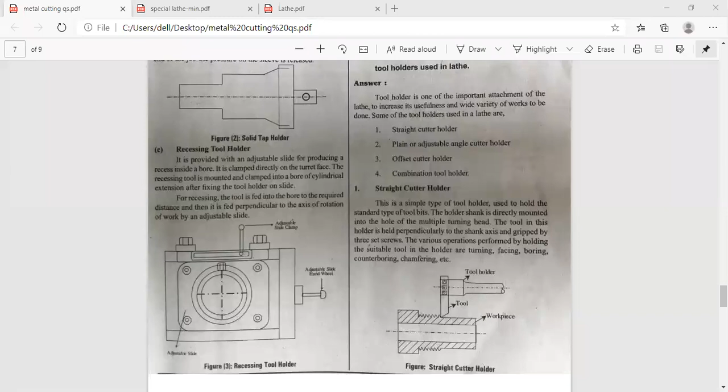Just try to go there. So we have a tool holder, we have the tool, and this is a workpiece, and mostly the holder shank. The shank is directly mounted in the hole of the multiple turning head.

We have different multiple turning heads, but here we will use only one type, because in the turning centers we try to use more of them.

So the tool in this holder is held perpendicular to the shank axis, and gripped by 3 set screws, as shown in the figure.

The various operations performed by holding the suitable tool in the holder are turning. So what operations can you perform? Turning, facing, boring, counter boring. After boring, you go for counter boring up to a certain depth of that particular hole, or the already bored hole. And chamfering, etc.

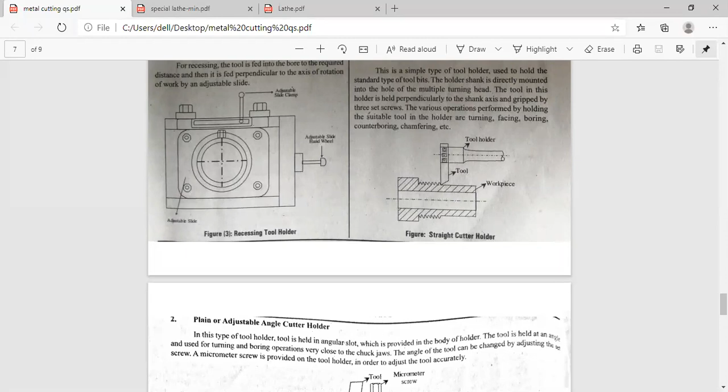Chamfering is an important part in order to reduce sharp edges. You might have seen all that in the practicals in the machine shop, and you have the lab also, so you can know it very well.

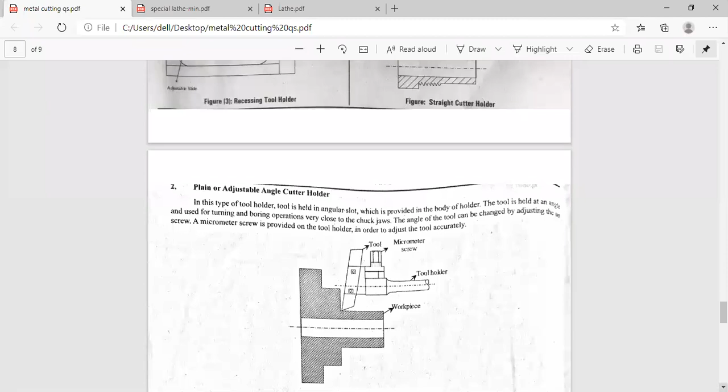The second one is the plain or adjustable angle cutter holder. In this type of tool holder, you can see the tool is held at an angle, which is provided in the body of the holder.

This is a micrometer screw, used to hold the tool at a particular angle for turning operations. Boring operations are performed very close to the chuck jaws.

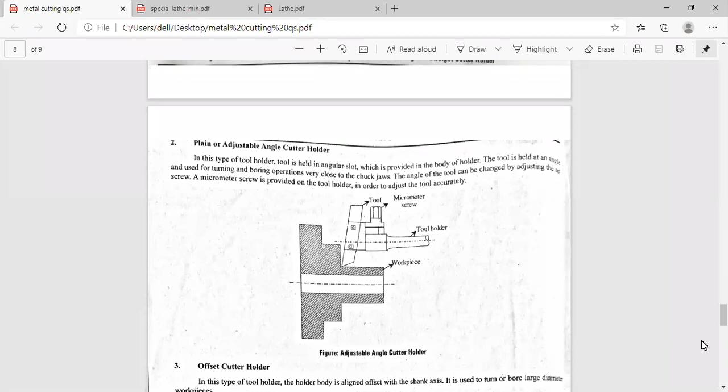So the angle of the tool can be adjusted by adjusting the set screw, the micrometer screw, which is provided on the tool holder. Other tool holders don't have the micrometer screw, because in this adjustable angle cutter holder, you have to set the tool at a particular angle. This is a very important type of tool holder where you want machining operations at a particular angle.

Now just try to see the diagrams. This is a step, and this is the workpiece, the job, and the tool holder. This is the tool, and these are the set screws, which fix the particular tool on the body of the tool holder.

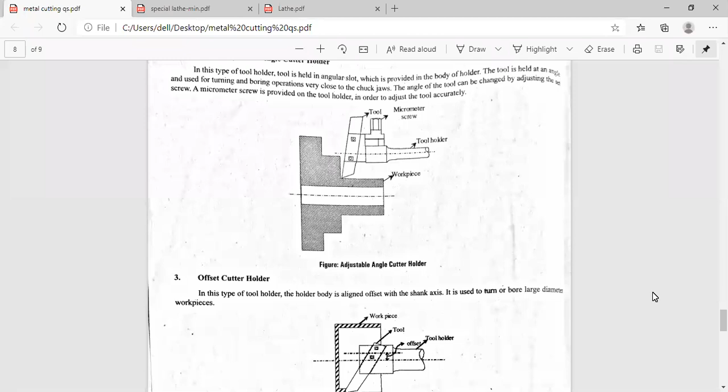So if you want angular slots, angular grooves, or any other such operations, you have to use that particular plain or adjustable angle cutter tool holder. So what is the offset cutter holder?

Offset cutter holder is one of the particular holders in which we try to provide the tool at a particular offset. Offset means not exactly aligned. This is the axis, this is the tool, this is the job axis, and you try to have that particular offset. The thing I'm showing by the arrow is offset.

The tool offset, how can anybody determine the tool offset, how do you calculate the tool offset? Tool offset is nothing but you have to take half of the diameter of the cutter or half of the diameter of the tool. Suppose the diameter of the tool is 1 mm, you try to take the offset as 0.5 mm. That is very important because tool compensation and tool offset are very important terms in computer aided manufacturing.

And we have angular offsets, so particular offsets can also be made with the offset cutter holder, if we want a particular offset for the particular job or workpiece as per the design. And tool compensation, we have left hand tool compensation and right hand tool compensation, with some G codes related to that compensation in CNC programming.

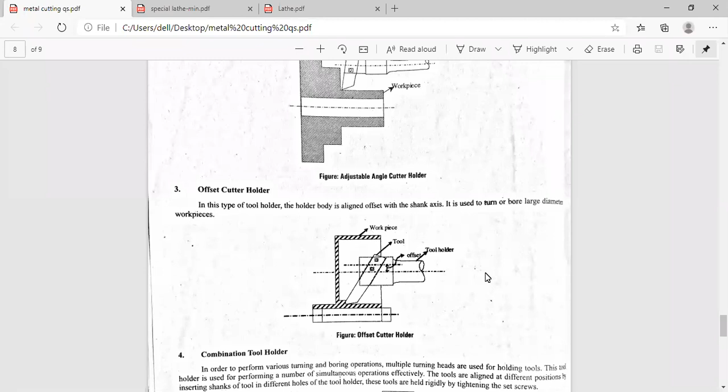But as of now, what is tool offset? Already I told you, you have to take half the diameter of the cutter. This is the tool holder, and this is the tool. We have the set screws. This is the workpiece where we have to go for the offset. So in this type of tool holder, the holder body is aligned offset with the shank axis. This is the shank axis, so it is held at an offset. So you have to calculate that offset and try to turn the tool with that particular value.

So here it is used to turn or bore large diameter workpieces, and you have to use it as per the design, whatever your requirement is.

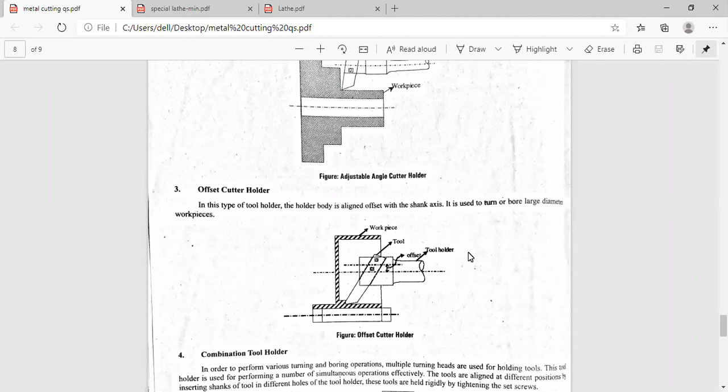So next one, it is a combination tool holder. Combination tool holder is nothing but you have to...

Ajad, can you hear me? Sir, yes sir. Okay, sometimes internet connection is unstable. I'll be asking at that time.

So in order to perform various turning and boring operations, all these particular combination tool holders are used. This is a combination tool holder, and it is used for holding multiple turning heads for using a number of tools like the boring or turning tools, or you can have not only boring, but drilling and reaming operations also.

So it's not exactly like in the textbook. It's a combination of operations like yesterday we have discussed. So this tool holder is used for performing a number of simultaneous operations effectively. That is the very important feature of this one.

And the tools are aligned at different positions. You can see tools, this is one turning head, this is another turning head. So whenever you finish a particular turning operation at this particular head, you can switch over to the other turning head.

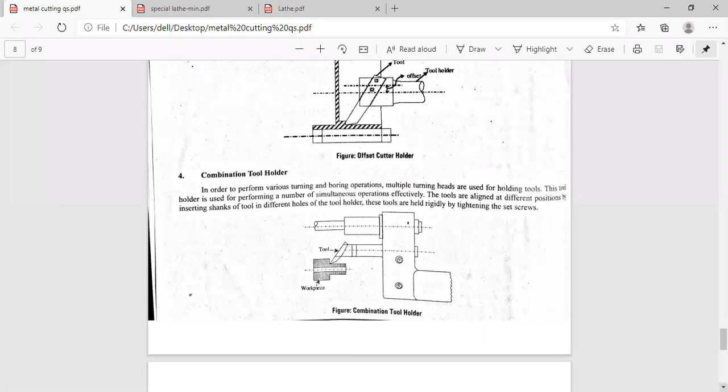So what are the different types of tool posts? We just try to discuss now. Tool holding devices we have finished, and whatever things we have not discussed, as far as today we'll try to finish off all the things related to tool holders, and slowly we'll go for the introduction of the turret lathe and capstan lathe. In one of the PDFs, you have to share another PDF.

The tool post is generally used for the purpose of holding the tool. You know what is the tool post? Already we have seen in the general lathes or the engine lathes or the all gear head lathes, different lathes are there in the particular machine shop, you'll be having that. So it is imparting a rigid support during the machining.

So what are the different types of tool posts? One is the American type single tool post. This is mostly a simple tool post, also known as the American type of single tool post. The tool post where the cutting tool is held by means of a bolt or a set screw at the top, and this is the rocker arrangement. This is the flange of the particular tool post, and in this single tool post, only a single point cutting tool can be held.

Only a single tool. I already told you the difference between a single tool post and a turret - hexagonal turret, an octagonal turret, or a disc turret, which can handle up to 14 tools.

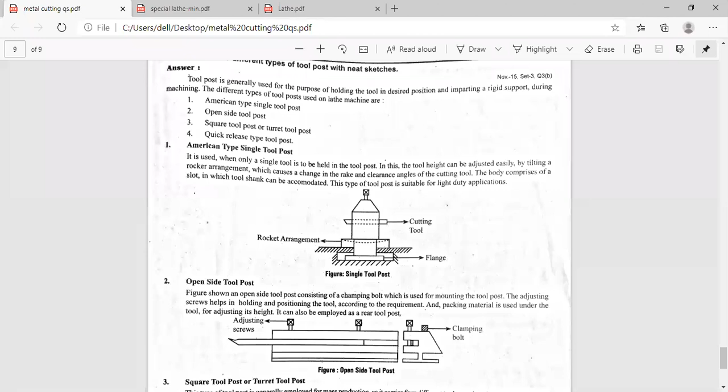It consists of a clamping bolt which is used for mounting the tool post - you have to mount this tool post on the cross slide. So just try to see, the adjusting screws help in holding and positioning the tool according to the requirement. So all these are very important aspects, and you have to use packing material under the tool.

So sometimes what is the packing material? You may be saying only small flat mild steel pieces - they are known as shims, S-H-I-M. In the industry, we used to name them as shims because traditionally the production engineers try to make the shim on the surface grinding machine according to a particular thickness - 0.5 mm, 0.25 mm, not more than 1 mm.

Actually, a shim is a small, slender mild steel sheet, just like this GI sheet. We just try to make it and adjust the tool height. So it can also be employed. This open side tool post can be employed as a rear tool post,

because we can have two tool posts, one at the front and one at the back, because in the machining centers, in the turning centers, we try to adopt two tool posts. Suppose the machining operations are finished on the front tool post, we'll try to change over to the rear tool post. This is known as shuttling, from one tool post to the other.

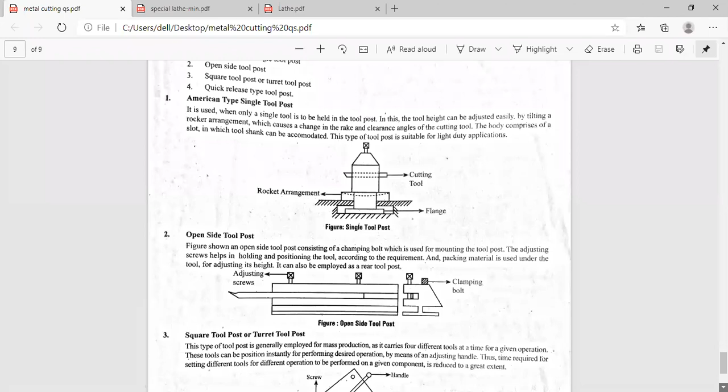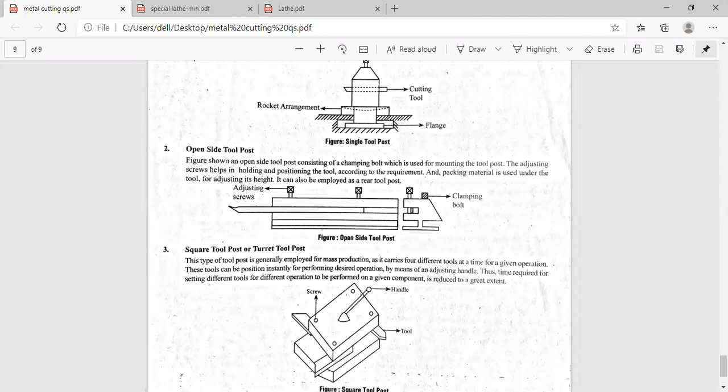So the square tool post is a common design which is employed for most of the lathes, the engine lathes, the square tool post, or the turret tool post in case of the turret lathe. So it is used for mass production. It carries four different tools at a time. Why is it designed for mass production? Because the machine setting or the tool setting can be done at a time for a given operation.

So these tools can be in position. This is one tool, this is one tool, this is one tool, and you fix the tool by means of set screws. So these tools can be positioned instantly for performing the desired operation. So you have to have the adjusting handle to position the tool instantly at a particular place to perform the particular operation, turning, facing or drilling, different operations.

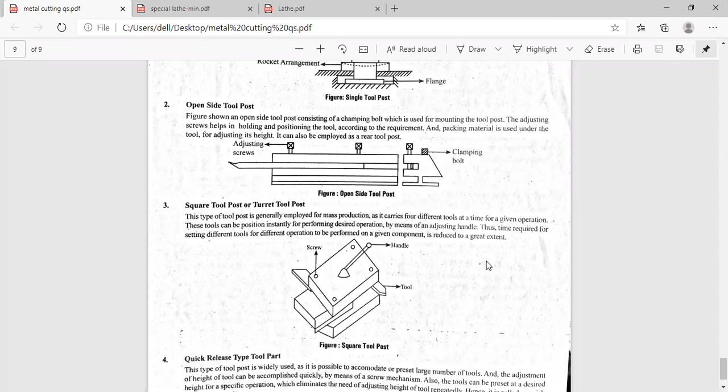So what is the time required for setting different tools? What is the advantage of the square tool post, or the American type, or the open side tool post? We can reduce the machine setting time drastically, because we are setting different tools for different operations to be performed on a particular workpiece or job simultaneously. So whenever that operation has been finished, you position the next tool in front of the job or workpiece. That is the advantage of the square tool post or the turret tool post.

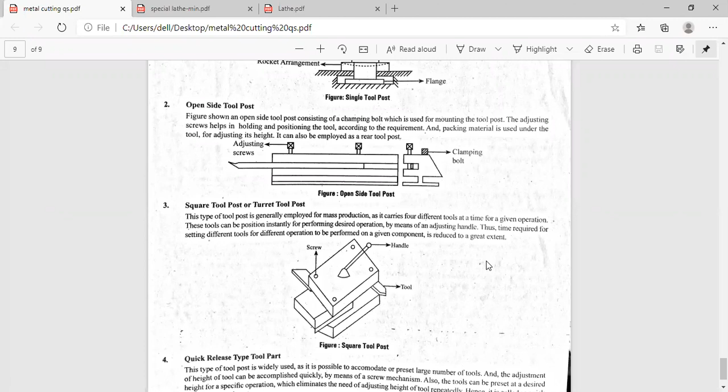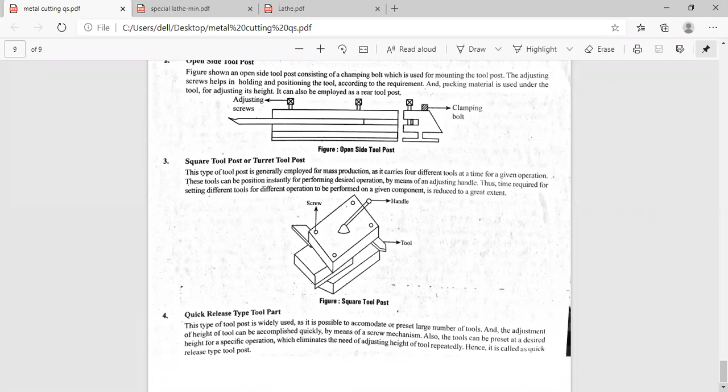It is very important that you have this particular thing. This is also very important as far as the examination is concerned: the work holding devices, the tool holding devices, and the tool post. So the quick release. It is quick change tooling. The quick release type of tool post is used in quick changing of tools. So it is mostly used to accommodate whatever number of tools are there.

Actually, in the machining center, another feature I want to tell: you can have a large number of preset tools in the tool magazine. It's a storage of the tools. Why has the word magazine come? In the .22 or the .303 rifles used in the army or navy, they have magazines for the bullets that have to be loaded in the gun. The ordinary gun has 6 bullets, but the tool magazine can accommodate, the theoretical limit is 48, 54, and 60.

So you may have a single row or a double row; we have different types of tool magazines. We will discuss them later. Double row means another expandable type of tool magazine. It can accommodate another row. And we have the chain type of tool magazine. We'll discuss it in the CAM subject. So manufacturing is a very interesting subject, because of automation, and because a country's economy depends on the hands of the manufacturing people.

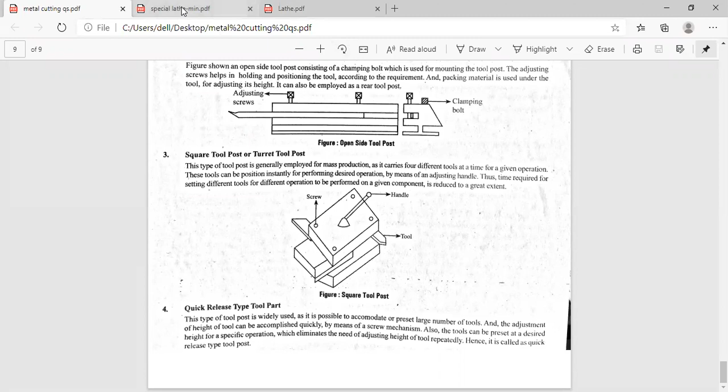In computer aided manufacturing, it is known as quick change tooling. So that is very important, and it is a quick release type of tool post, which is very advantageous when compared to the other tool post. That is very important. So we'll just switch over to the things we have not covered yesterday. Another new share, we'll just try to go for that.

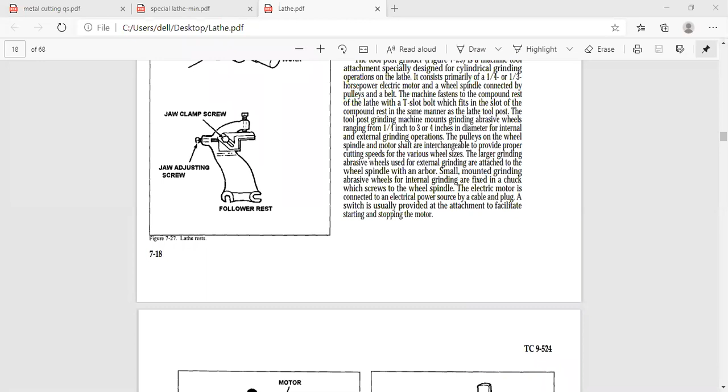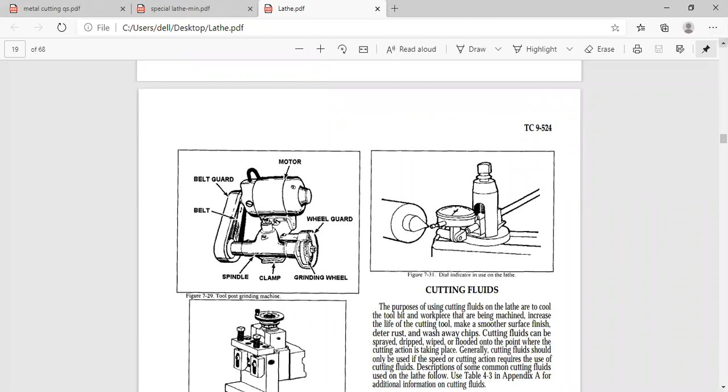Now, all this was taught yesterday, only the revision I am doing now. Okay, so we have the grinding wheel, and I want to tell about the tool post grinder. The tool post grinder is given in one figure. We see where we use the tool post grinder, especially designed for cylindrical grinding operations, because the surface grinding machine is another machine tool, which we will discuss in unit 4 or unit 5.

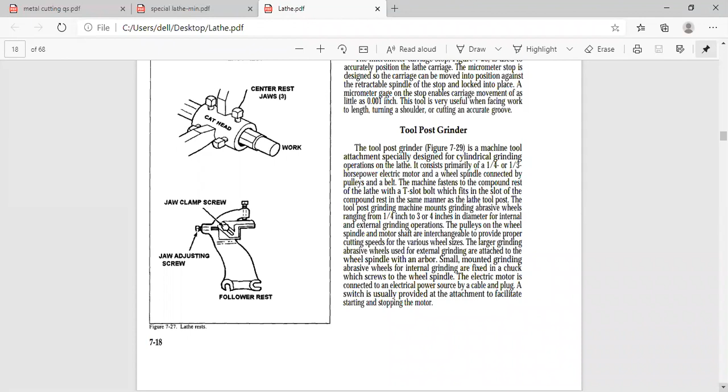But this is a completely different type of tool post grinder. We have abrasive wheels for internal grinding, and they're fixed in a chuck. So just see the diagram related to the grinding post. This is the tool post grinding machine. Here we have the motor. This is a belt guard. This is a belt where we operate the grinding, if you want to go for slow grinding or medium grinding, because it will affect the surface finish on the job. So this is the wheel guard.

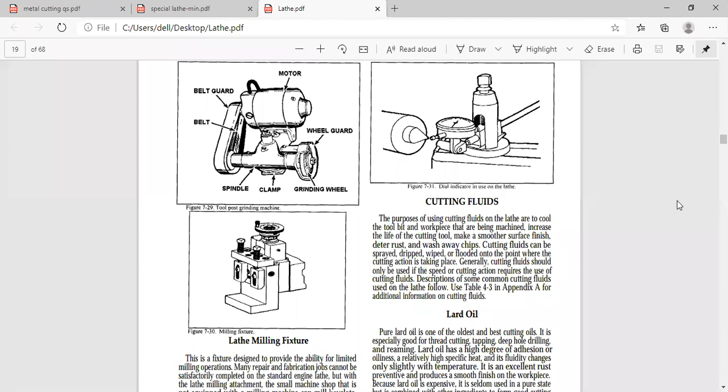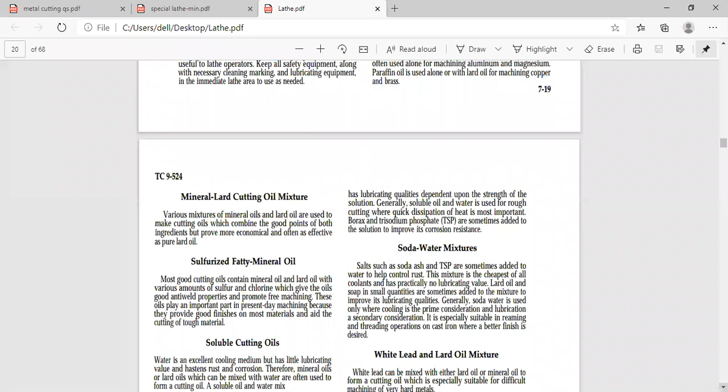This is the grinding wheel. Grinding wheel we will discuss, because it is one of the grinding operations. We have to have an abrasive type of grinding wheel with different grits, silicon carbide and other types. This is a clamp, this is a spindle. So this is a tool post grinding machine. Other than the quick change tool post, you can add this tool post grinding machine also. So all these are very important things. Here these mandrels were discussed.

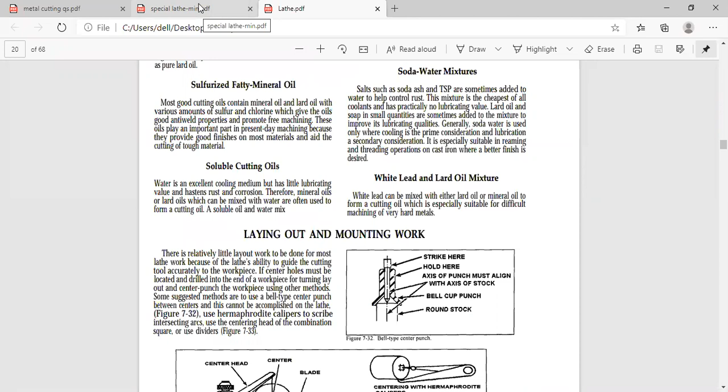So we'll just try to move to another PDF where we have the introduction of this particular topic. I'll go for the new share now. So we'll try to switch over to this particular screen. Can you see the screen now, Ajad?

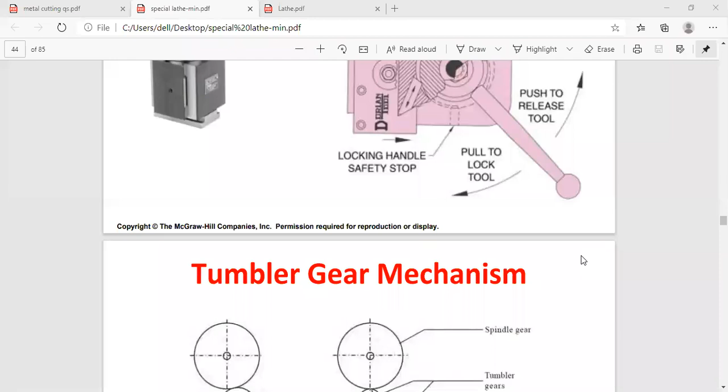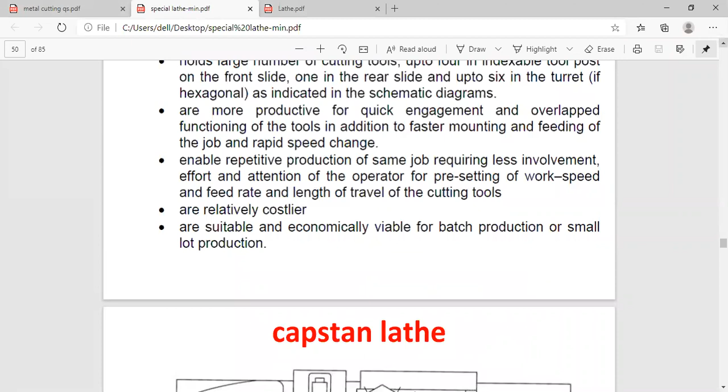Yes, sir. Okay. So now we'll go to the introduction of the capstan lathe. We have finished all the previous things, and slowly we'll finish the capstan lathe and turret lathe tomorrow. Today we'll go for the introduction, and we'll see the differences between the capstan lathe and turret lathe, the differences between the capstan lathe and engine lathe, and everything.

So in contrast to the center lathe or the engine lathe, these lathes are semi-automatic. What are the features? They possess an axially movable indexable turret. Already we have spoken a lot of times: the tailstock is replaced by the hexagonal turret. It holds a large number of cutting tools, up to 4 indexable tool posts on the front slide.

So you can use a square tool post, or you can use the hexagonal turret. You can use 2 tool posts, one on the front slide and the other on the rear slide. So you can use up to 6 tools in the hexagonal turret, and you will see the diagrams later, but we go for the introduction now.

These are used for quick engagement and overlapped functioning of the tools, like the quick change tool post, in addition to faster mounting. You have to feed the job, go for the quick change tool post, and go for the rapid speed change, because the rapid speed change is done by the tumbler gear mechanism. We will discuss some of the mechanisms at the end, after the discussion of the capstan and turret lathes, because they're very important.

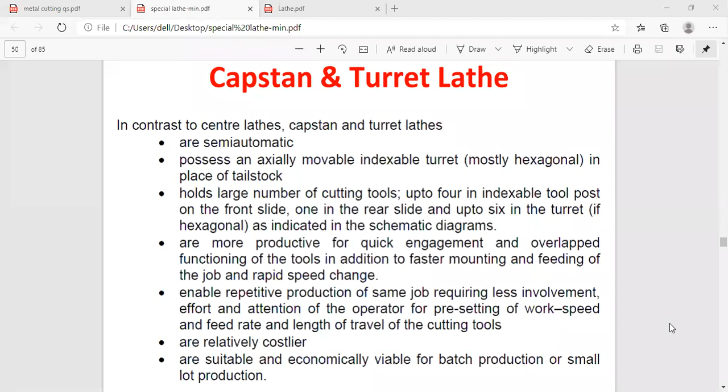The machine setting time is reduced drastically when compared to the center lathe, and that's why the productivity is more. The same design of job pieces, the same batch of job pieces can be made. That's why it's useful for batch production. So all these are the particular type.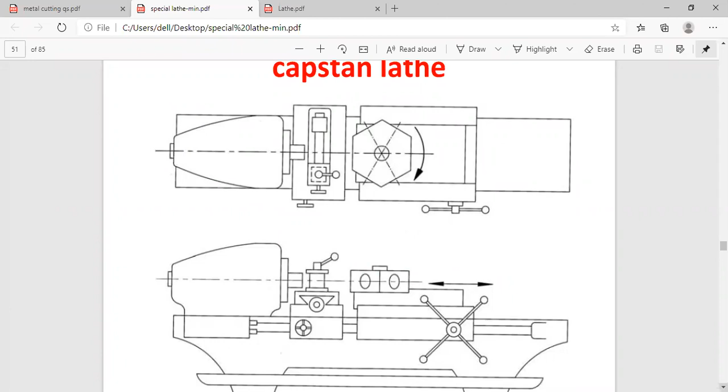This is a tool post. This is the handle of the tool post. This is the hand wheel to operate the carriage. So all these are semi-automatic. The tumbler gear mechanism, whatever mechanisms are there for the change of the spindle speeds, can be incorporated at the headstock side, because it is covered.

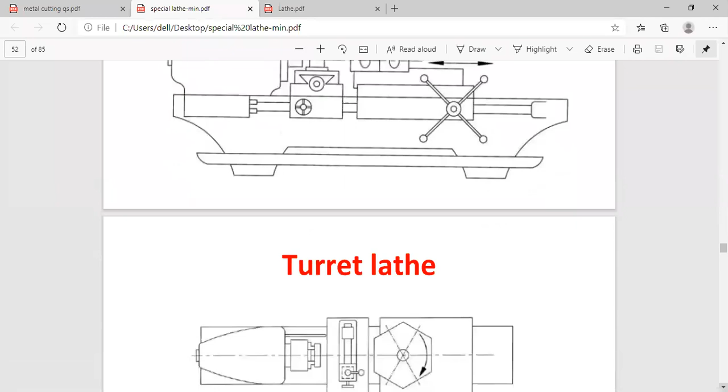This is a simple diagram anybody can draw as far as a capstan lathe is concerned. You already know the components. The other components we have discussed in a center lathe or engine lathe are same, except the hexagonal turret, which is replacing the tailstock. We don't have the tailstock in the capstan and turret lathe. The hexagonal turret, everything is same.

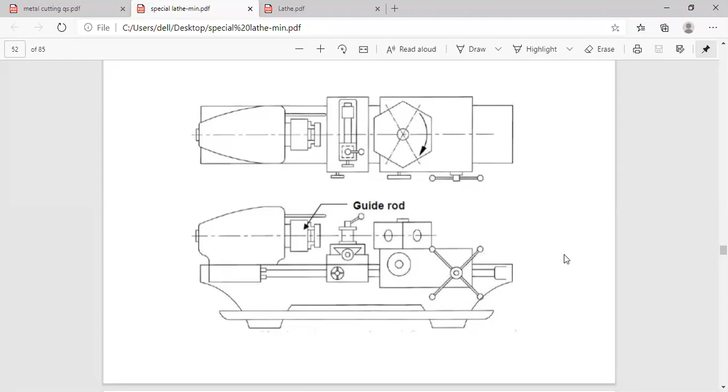So everybody can ask what is the difference, because some of the guide rods may be missing in the capstan lathe. In the turret lathe, the guide rods are there to guide the guideways or the job pieces. The hand wheels, the tumbler gear mechanism, and the feed mechanism, automatic or semi-automatic, everything is there. So concentrate on this part also, the capstan and turret lathes, which are very important.

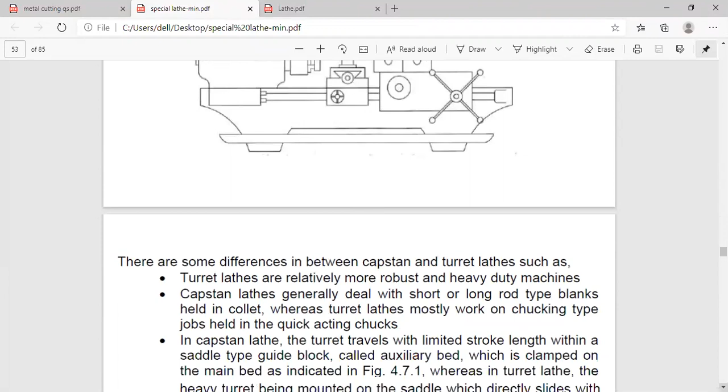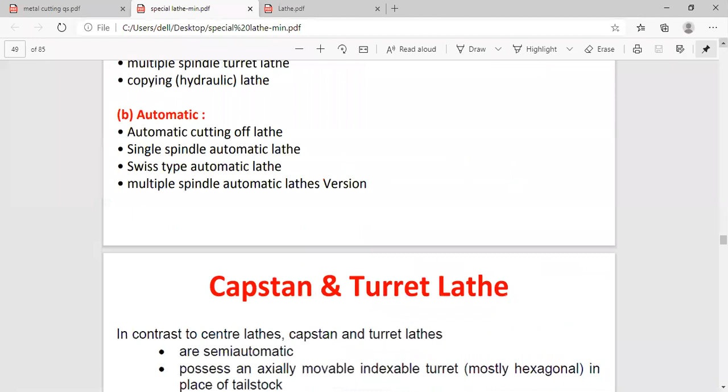This is only introduction. That's why I'm going fast, but you will try to know the differences tomorrow. So try to draw the figures related to this, and these are very important features which we have discussed. If anything is there, we'll discuss that today itself, and we'll continue later after the capstan and turret lathes. We just try to scroll and see.

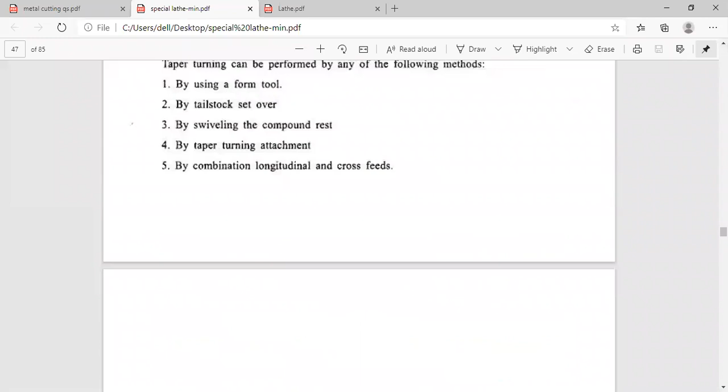So we have finished the taper turning methods, but we have the semi-automatic and automatic lathes also. In computer-aided manufacturing we have two keywords, fixed automation and flexible automation. Flexible automation is where we use computer numerical control machines, CNC machines, and fixed automation is like the capstan lathes and turret lathes, where you don't use CNC part programming, G codes and M codes. That is the main feature of semi-automatic.

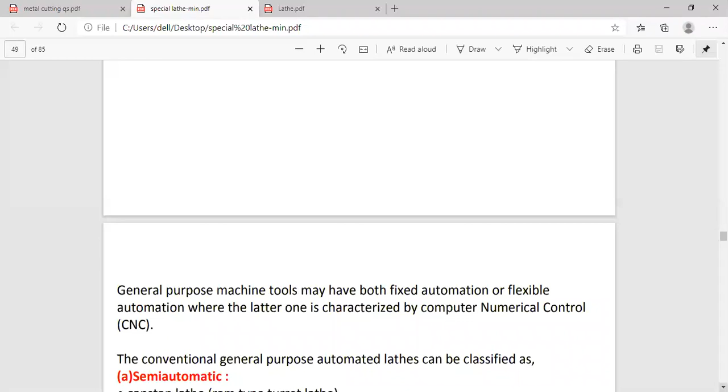In the semi-automatic classification, we have the capstan lathe. The capstan lathe is also known as the ram type turret lathe, because you have a ram, just like an overhanging beam, a heavy duty ram. Then we have the ordinary turret lathe. The turret lathe is mostly governed by the saddle. We'll see what are the important features of the turret lathe also.

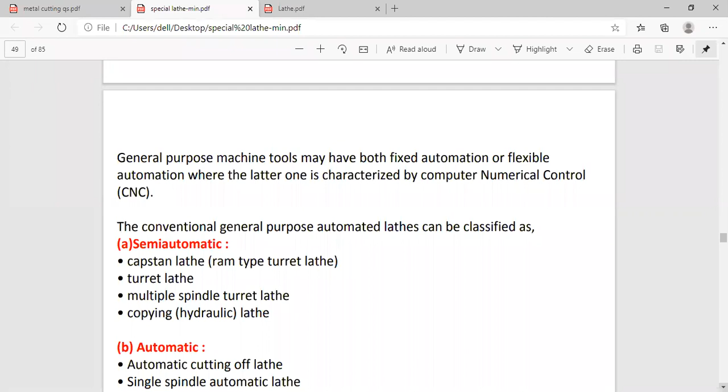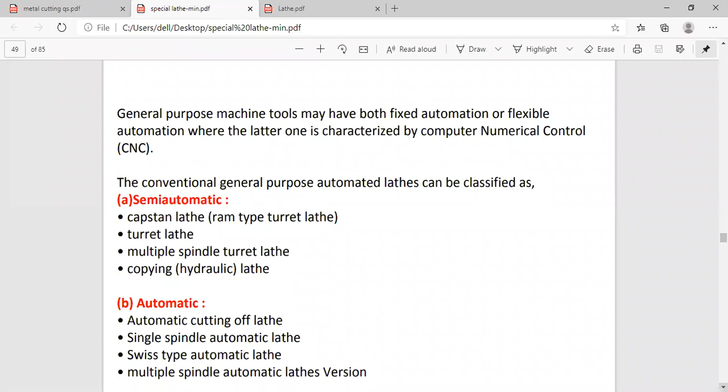And we have the multi-spindle turret lathe, like the multi-spindle automatic lathe, where we can use more than one spindle: 2, 4, 6, 8 spindles. And we have the copying lathe, just like the form tools designed for a taper turning operation. This is a hydraulic actuated lathe; we use hydraulic cylinders in the copying lathe. So semi-automatic lathes include the capstan lathe, turret lathe, multi-spindle turret lathe, and the copying lathe. As already told, concentrate mostly on the capstan and turret lathe.

In the automatic lathe category, we have the automatic cutting off lathe, the single spindle automatic lathe, and the Swiss type of automatic lathe.

Swiss type automatic lathes are also known as automatic screw machines, because they were mostly designed by the Swiss people of Switzerland. Apart from turning and facing operations, in that country they used to turn external and internal screw threads. Instead of using taps and dies, the threading tools are designed according to the particular form, whether external or internal. That is the Swiss type of automatic lathe.

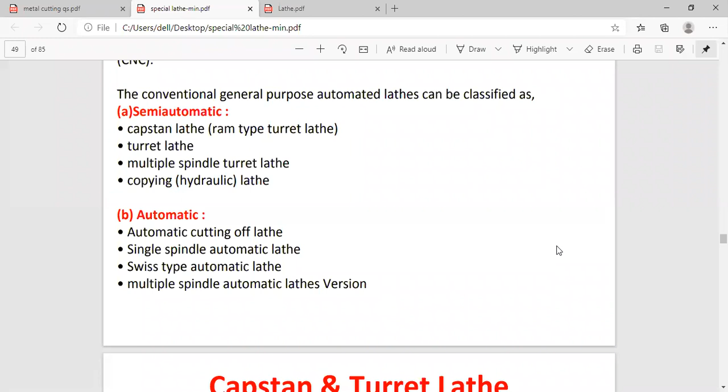So we have single spindle and multi spindle types. Single spindle uses only a single spindle, but in a multi spindle automatic lathe we use more than one - 2, 4, 6, or 8. Mostly we use even numbers, because in a particular lathe, for corresponding headstock you have a corresponding cross slide. In the case of multiple spindle automatic lathes, you have different cross slides.

Suppose you number them 1, 2, 3, 4 - you have cross slide 1, cross slide 2, cross slide 3, cross slide 4. Each cross slide has its own action. The movement can be done by means of hydraulic movement, pneumatic movement, or by means of the cam.

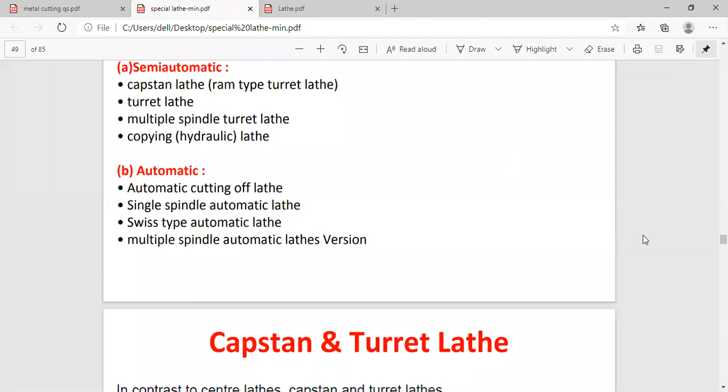Cam is a very important word because a cam is used in the machine shop, especially in the automobile manufacturing industry for finish OD turning of a piston, which is the second last operation in piston manufacturing. You just try to learn this, because you might only have knowledge of the center lathe and engine lathe, but you'll be going on to the semi-automatic and fully automatic lathes.

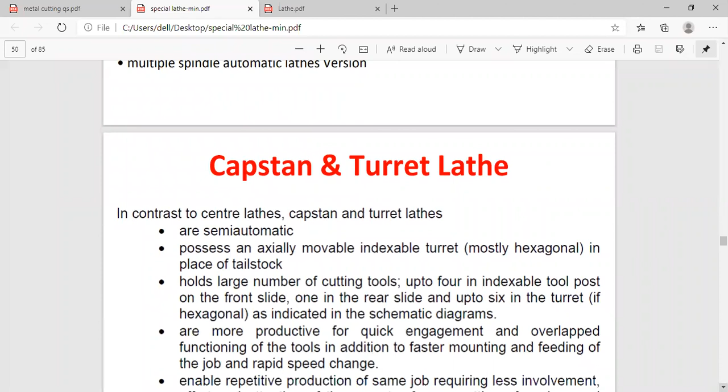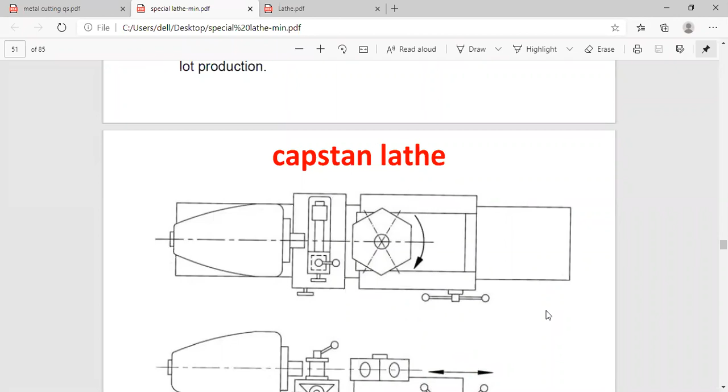We have 6 stations in which we can accommodate whatever tools we want to perform for that particular job. That is very important. So just try to see this particular arrow also, this carriage movement or cross slide movement - all these are very important. This is the cross slide movement which is perpendicular to the spindle axis, the lathe spindle axis. So this is a tool post.

This tool post can be a square tool post or a quick change tool post, but mostly in capstan and turret lathes you use the quick change tool post, because you have to reduce the machining time and the tool setting time, and by that you can enhance the productivity of that particular batch production by producing more pieces.

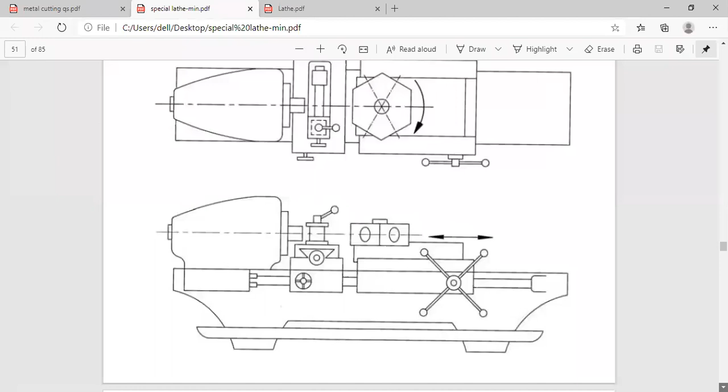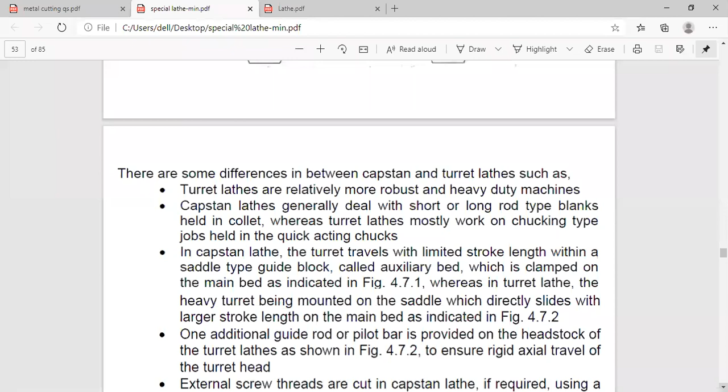So all these are very important in capstan and turret lathes - you have to see what is the feed rod, what is the guide rod. What are all the components, we have already discussed. Capstan and turret lathes are more robust than the center lathe, engine lathe, and other heavy duty machines. You just try to see, and we can machine lengthier work pieces.

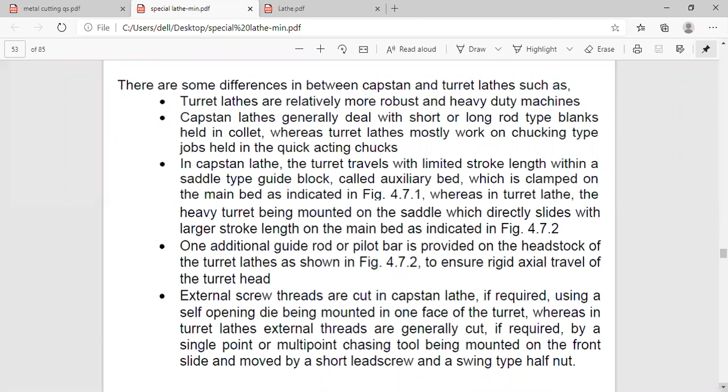Already I told you yesterday, you have seen the collet chuck. For accommodating long pieces, you have to use collets instead of the 3-jaw universal chuck or the 4-jaw independent chuck. So all this you have to see. The turret lathes are mostly of the chucking type, so just try to see.

And we have quick acting chucks also, like quick acting tool holders - like that we have. You have to see what is the stroke length, every feature, every important keyword, you have to catch that. So how the turret will travel, how the saddle will travel, how the carriage will travel, how the carriage has a carriage top.

In the tool grinding machine or the tool grinding tool post, or in any other particular tool post, it is governed by the micrometer dial - how much stroke length you have to give for a particular job, or how much the turret travels. So it is limited by the stroke length, and you have to adjust the guide stop.

The guide stops are different in different machines because in a machining center they're known as automatic feed stops, but in the capstan and turret lathe they are semi-automatic, and in the engine lathe or the center lathe they are manual or semi-automatic. So you have to know where the particular turret will travel, how much it will travel, and where you have to clamp the hexagonal turret on the main bed. All this is very important, and we'll try to discuss it.

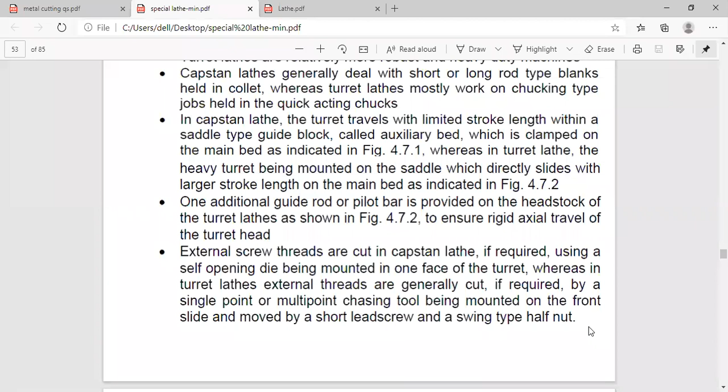In the capstan lathe, the external threads are cut. Suppose you have to have some particular opening die, you have to provide that die for that external thread, so you have to know the difference between tap and die. In the turret lathes, these external threads are generally cut by a single point or a multi-point cutting tool, whereas in other types of machining centers, we have the thread turning tool to cut the external threads and the internal threads.

The differences also you should know.

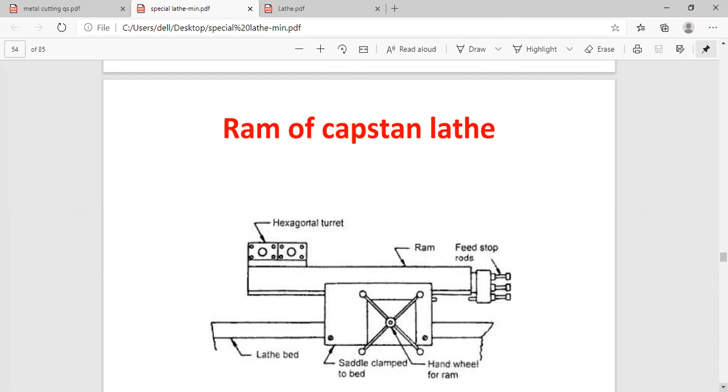Already I told you we have the RAM type - we'll discuss all this tomorrow. This is the RAM, heavy duty RAM, it is almost a hexagonal turret. Here we have the feed stop rods - just like the guide stop, we have the feed stop rods to regulate the feed. And this is the lathe bed, this is the hand wheel for the ram movement, and this is the saddle clamp on the bed.

All this we will be discussing tomorrow, because this is an introduction class related to capstan and turret lathe. So you have to know the type of the capstan lathe and the saddle type of turret lathe.

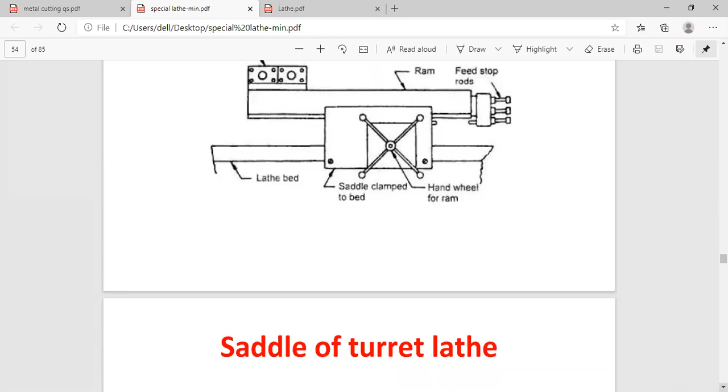In the saddle type of turret lathe, we have the hexagonal turret, the turret saddle, the bed, and the hand wheel for the saddle, to keep the saddle in a particular position relative to which tool you are using, in the hexagonal turret, nearer to the job.

So all this - the tool heights and everything - are not there manually; automatic tool adjustments are made, or semi-automatic, you can say.

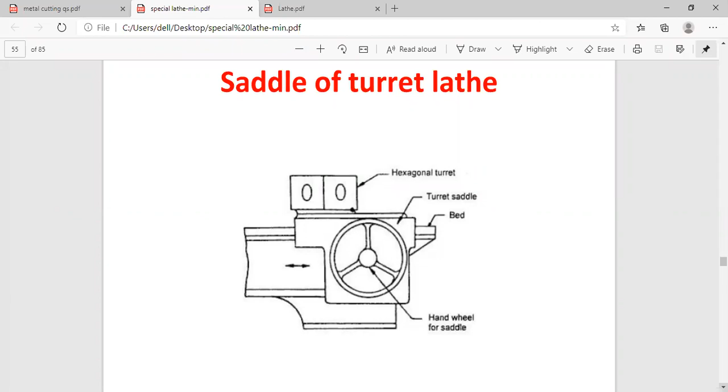If it is automatic, slowly it will go to the computer numerical control machines, where you have to adjust the tool offset in the x-axis, the y-axis, and the z-axis by means of the control unit. You have the control unit offset, and whatever calculations you are making for a particular tool, you have to compare with that machine tool offset or the control unit offset. If it matches, or if there is only a small error, that error will be compensated by the particular error compensator or position compensator as far as the tool position is concerned, or the velocity control, or the speed control. So all these controls are there, which you will be learning in the control systems, the closed loop control systems, as far as the CNC control lathe is concerned.

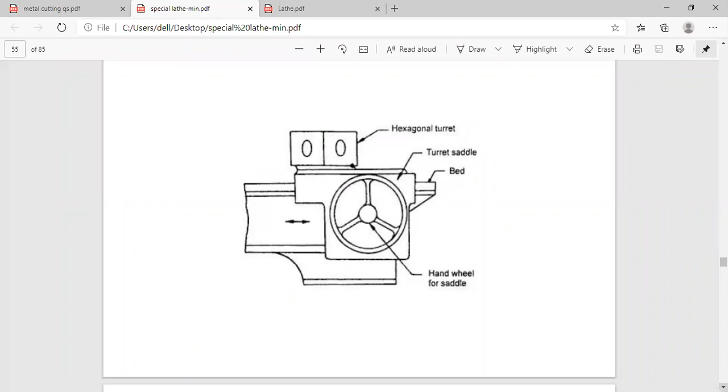We'll stop at this particular thing. Tomorrow we'll start with the capstan lathe and turret lathe, and slowly, after going through the diagrams and the features, we'll know the difference between the capstan lathe and the turret lathe. That is very important. Okay, you can leave.